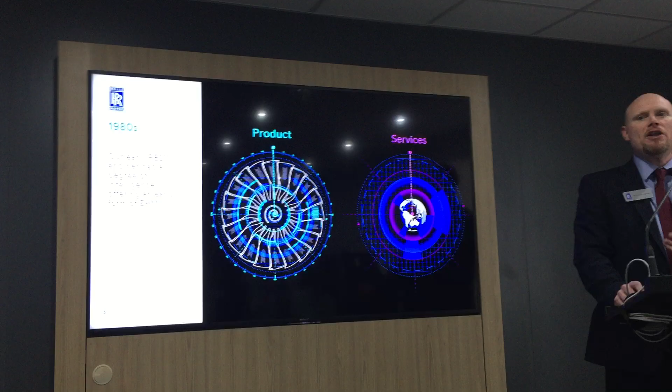Taking this back to the earliest form, arguably, of an intelligence engine, we go back as far as the 1980s, because we have been using what people are referring to as big data these days for decades. We started that on the early RB211 engines, when we pioneered engine health monitoring, getting data from inside the engine, understanding pressures, temperatures, shaft speed and vibrations, to better understand how the engine was operating. But it was an early form of EHM, and we weren't really using that data prognostically, we were using it diagnostically.

If you consider the world of product and service, they were very much separate. What do I mean by that? I mean we weren't providing a long-term service agreement, we effectively sold the product, and then when the product needed some form of maintenance intervention, we would help the airline by selling parts or overhaul capability to get that product back into serviceable condition. We didn't combine the product and services package.

But if we fast forward to the 1990s, with the advent of the Trent family, we also introduced total care, and that turned the world of servicing of aero engines completely on its head. Because one of the characteristics of the first model, where the product and service was different, was you had fundamental conflict of interest between the original equipment manufacturer, who effectively wanted the product to break so we could sell spare parts, and the airline who didn't want the product to break so they could keep the engine on wing for as long as possible.

This, in the 90s, turned that on its head because we charged airlines $1 per engine flying hour, so our interests were aligned. So the product and the service package started to come together and be linked for the first time. As we fast forward to today, progressively through each increasing member of the Trent family, we've increased the amount of data we're taking off these engines, being even more sophisticated in how we prognostically administer these total care risk transfer programs to the benefit of our customers.

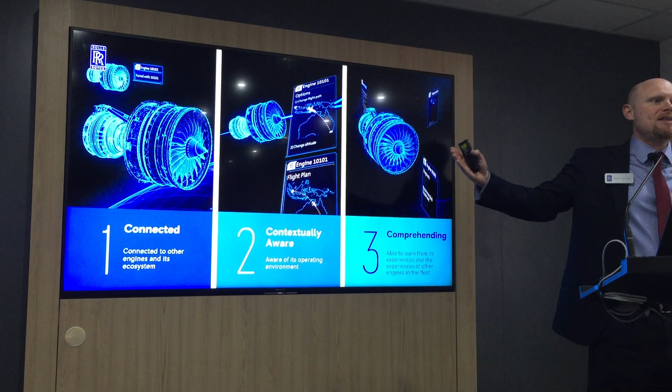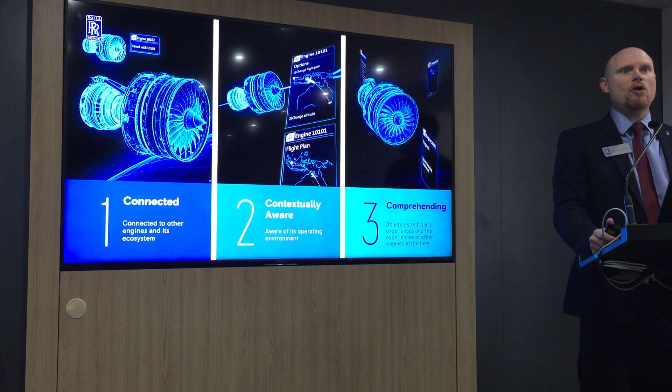Contextually aware is split into two halves, really. One of which is happening today, the other which is slightly more visionary and leads into the third C of comprehending. The first element is us, at Rolls-Royce, as the OEM, being more aware of the context in which the product's operating. The easiest way to think about that is broadening a virtual pipe of data from being one that takes data from inside the engine to a pipe that's bigger and takes data from outside of the engine as well. So we understand and know in what context that engine's operating, whether it be how the pilot's operating it, what weather the engine's experiencing, or the level of sulfur in the atmosphere that engine is flying through, and therefore there is a better understanding of how the turbine blades will sulfidate, as all aero engines do. So that's the first step.

The second one, which links into comprehending, is ultimately we envisage a world where the engine itself has an awareness of its own context. And as we'll see today with some of this technology, ultimately we see that the engine could potentially take action in and of itself to make decisions and take action that leads to a better outcome in terms of what that engine is achieving, either from a performance perspective or from an availability perspective.

So that's connected. We're already making progress, either through looking at the intelligent engine pages on Rolls-Royce.com or through examples that we've been bringing to life this week. There is tangible progress in all of those areas.

This one, for example, Taming the Volcano, talking about applying data analytics capability to moving from a world where we had to totally avoid volcanic ash to one of knowing how to model the effect on the engine, and therefore being able to direct an airline to when they can and can't fly through certain concentrations of ash. This is key because think back to Eyjafjallajökull, the volcano in Iceland that erupted in 2010. That shut down airspace for a significant number of days - 20 countries, 10 million passengers, $4.7 billion of revenue lost has been calculated. We can now be less binary and be more sophisticated in knowing when and how an aero engine can fly through volcanic ash.

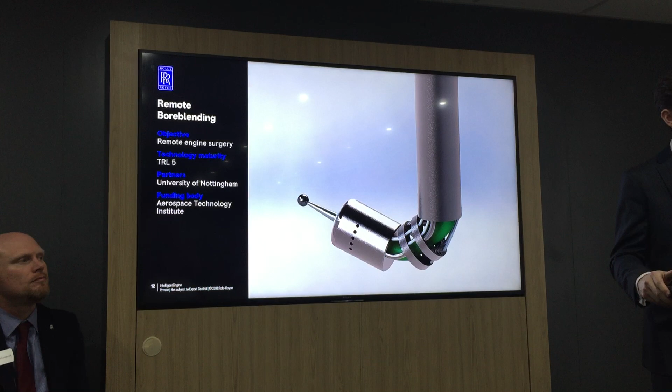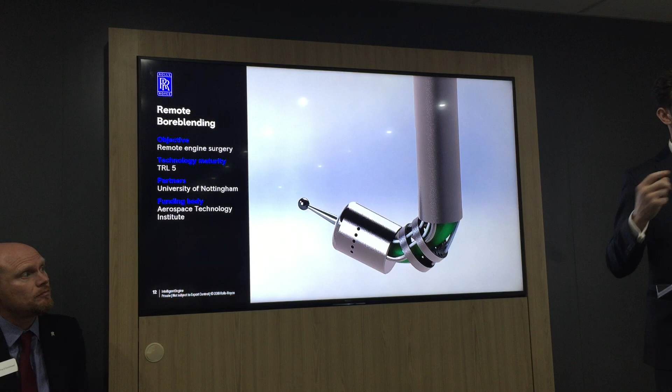So the first of those is a device that we call remote bore blending, and this is a technology that is enabling us to get inside engines and repair compressor blades whilst they are still on the engine. So the idea of this device is that it enables a skilled person to control the robot and actually perform a repair whilst the engine could be over the other side of the world. So this is a revolutionary service idea, and this is something that we'll take you through a video of in a second.

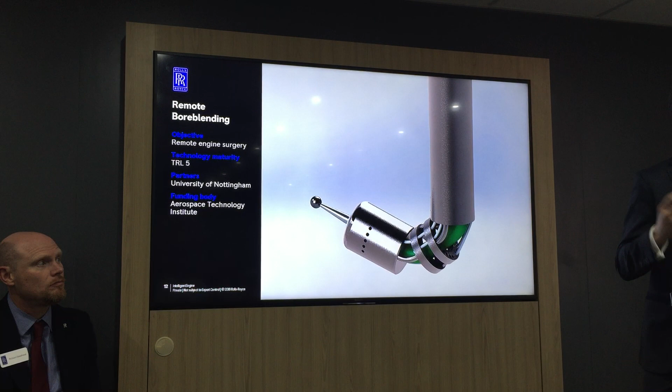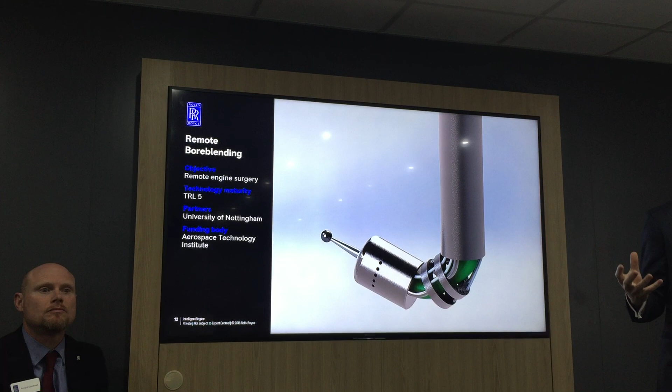Just before we get to that, just mention these things on the left-hand side of the screen - you'll see those for all of the case studies we'll talk about today. Basically, an objective of what we're trying to do, who we've got this funded by - in this case, the Aerospace Technology Institute, part of the UK government - who we're working with, in this case, the University of Nottingham, and the technology maturity level. So the technology readiness level is something that's kind of an industry standard, introduced by NASA in the 70s. It goes from 1 to 9, with 1 being a kind of a crazy idea, 4 being you've developed and demonstrated some of these ideas and the key components in a laboratory.

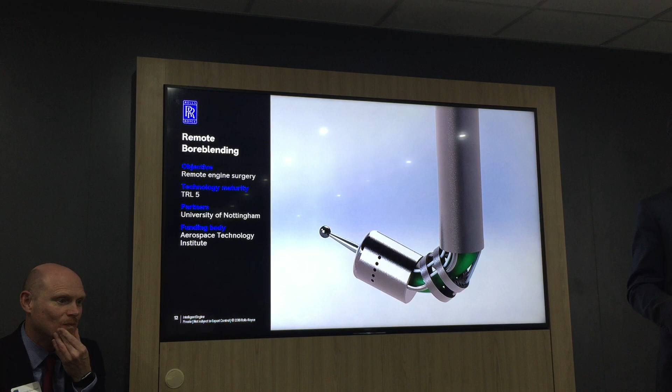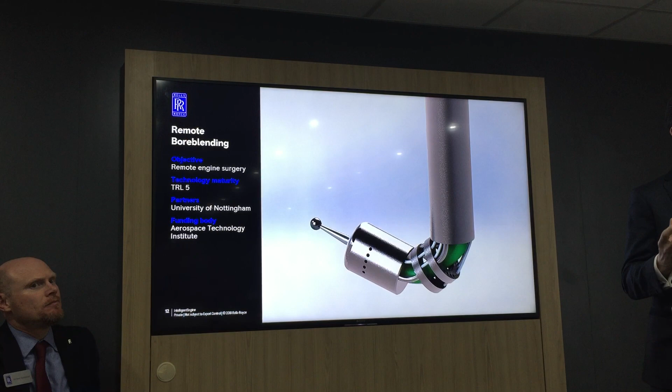Number 6 is where we have done a combined, contextually relevant systems engineering demonstration. We've actually started to develop these things and use them in the real world. So without further ado, let me quickly show you the first one.

This is remote engine surgery, developed with the University of Nottingham. I'm just going to quickly show you why we're doing this.

Generally speaking, these engines work out in service and often pick up some damage on the compressor blades. We send out skilled mechanics to perform those repairs, effectively with a long pole, and it takes a lot of skill, time and effort. There aren't many of those guys to go around, so we need to make sure they're in the right place at the right time.

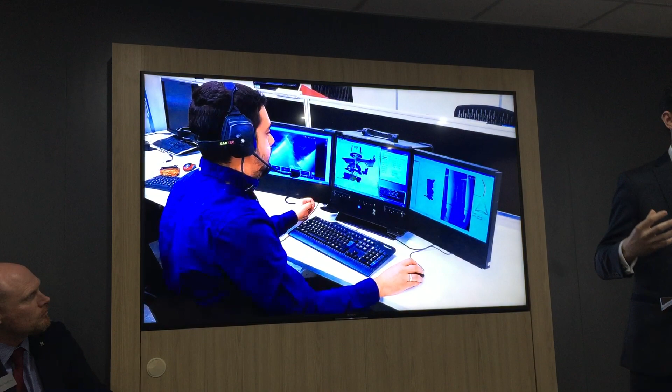Or we get a relatively unskilled person to bolt a robot, like you see to my left here, onto the side of the engine — anyone could bolt it on — and we, as a skilled person, can take control of that remotely from somewhere like Derby, a central availability centre, and start to repair the compressor blades.

So you see it here being introduced into the engine gas stream. You see the pictures on the left-hand side of the screen with the sharp end of the device going inside. What we're doing here is generating a 3D point cloud, which enables us to generate the trajectories we require to actually perform the repair.

That moves us on to a project we call Inspect. Richard was just talking about the engine being contextually aware — this is a device where, rather than just having ears on our engine health monitoring systems, we can have eyes on the health monitoring system, allowing the engine to inspect itself potentially.

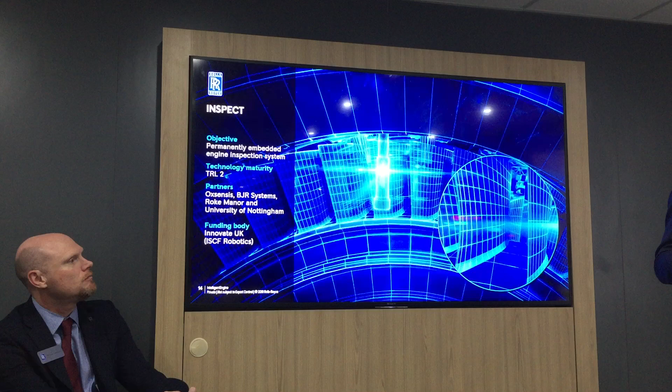As you'll notice, this project is at a slightly lower TRL level — it's not ready for service, it's something we're working on in the background. It's funded by Innovate UK, and we're working with a group of suppliers and partners you see on the left. But it's something we're quite interested in as a new concept.

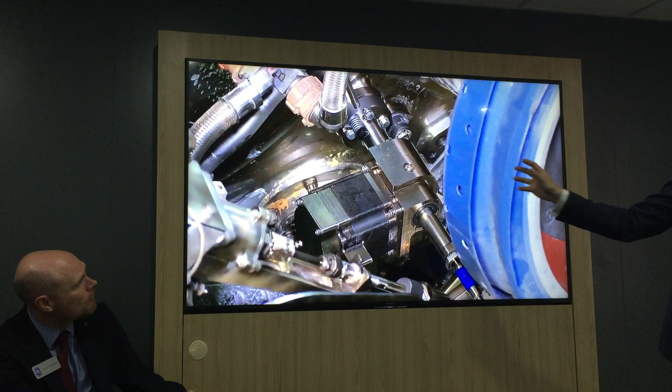The idea is that the engine flies around with a set of fibre-networked cameras. They have to be thermally managed because this is a very high pressure and high temperature environment. You can see one of the example devices being deployed onto the side of the engine casing, coming into the gas stream, illuminating the object of interest, which you now see in the field in the centre.

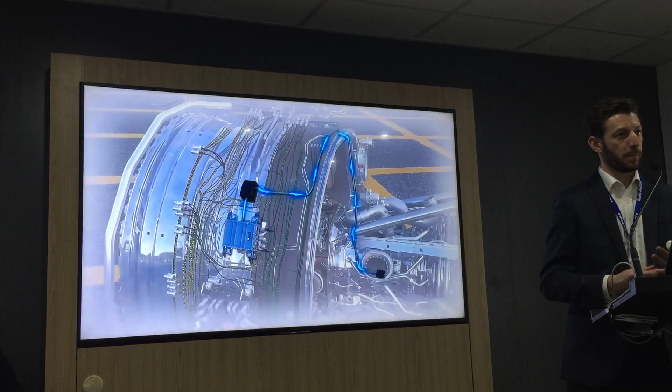Once the engine is rotating slow enough to perform an inspection, all of that information is brought through to the EMU, the engine monitoring unit, and sent back to the availability centre, where we can suck in lots of useful information. This provides a more contextually aware piece of engine inspection hardware. Because it's a data-rich environment, it's basically a big sensor connected to all the engines around the world, potentially opening up a big avenue for a big data environment.

The next one we've got here is an example of a pair of snake robots that go into the engine, not to remove material this time like in the first example, but to put material back on. So there are a couple of different things we're trying to do with all these technologies: either inspect things better, remove bits of damage, or put things on.

This is where we're trying to patch-repair some coating. It's a collaboration between a company called Metallisation in the UK and the University of Nottingham again, funded by the Aerospace Technology Institute. I'll show you a quick video.

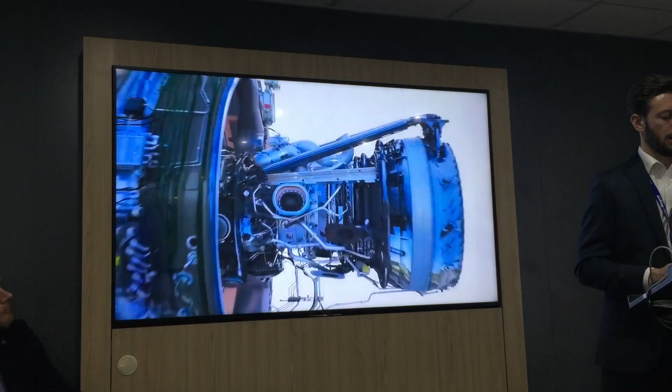As I said, we have two snake robots. We're entering in through the combustion chamber. You see the first one here. I'm not going to go into huge detail, but effectively these are segments that are tendon driven with cables, and I'll let Dragos talk about that in more detail when we talk about this device.

The first one goes down to the area there, inspecting the coating with a proprietary NDE technique, looking for any bits of delaminated material. The first snake robot is also then removing the material, removing the damaged parts, repairing the surface to allow for the second snake robot to come in and do the coating redeposition.

All we're trying to do here is perform a patch repair. We're not looking to bring this engine back to full health, just making sure that it comes back into the scheduled maintenance overhaul at the right time, not early, because that costs us money. Then those parts would be replaced when the engine is back to component level.

So the final example I've got for you today is a revolutionary way of inspecting a large structure. The combustion chamber we just showed you is a relatively difficult thing to inspect, because with conventional techniques you're basically pushing in a big piece of spaghetti with a camera on the end. If you or I were to perform that inspection, it would take a few hours to map the combustion chamber.

We thought, rather than doing that traditionally, we could put cameras on the end of small walking beetles and have them work in a team, whereby one goes to look in the far corner, another colleague goes to look in another corner, and collaboratively we start to map the whole environment.

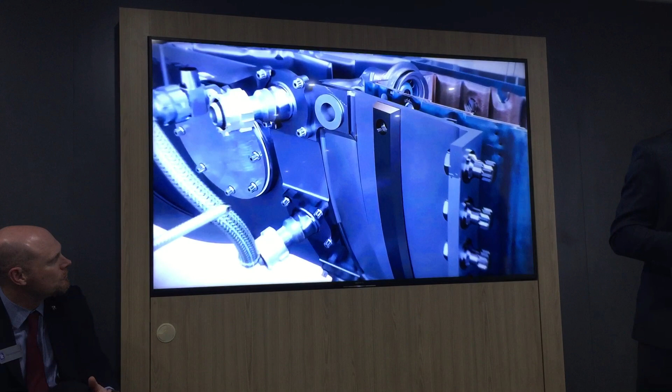So, as I said, we're going back into the combustion chamber, and the deployment mechanism is similar to the kind of things you will have seen previously—if you go on the University of Nottingham website, you'll see other examples of these technologies and engine demos we've done. This is a device that's now spitting out these miniature walking beetles.

They can go off scuttling around to all the far-reaching parts of the combustion chamber, and they're all throwing what they're seeing, their perspective, back to a central location, providing a bigger map like you see on the screen here. So it's a much more efficient way of performing the same kind of inspection.

If we did it conventionally, it'd take us about 5 hours. If we did it like this, who knows, we could probably do that in maybe 5 minutes.

As I said, we bring them back in. We're not ever wanting to leave those things in place—that's obviously a very inconsiderate thing to do. We bring them back out, and then send the engine back on its way.

So that's four examples of some of the revolutionary technologies we're developing with our partners across the world. A lot of these aren't ready yet—we've got a lot of work to go to get them more mature. However, you will see some examples of technologies, like the one to my left, where we've actually done engine demonstrations and are looking to go live very soon. I'm going to hand over to Royce and Sebastian to talk about some of the detail.